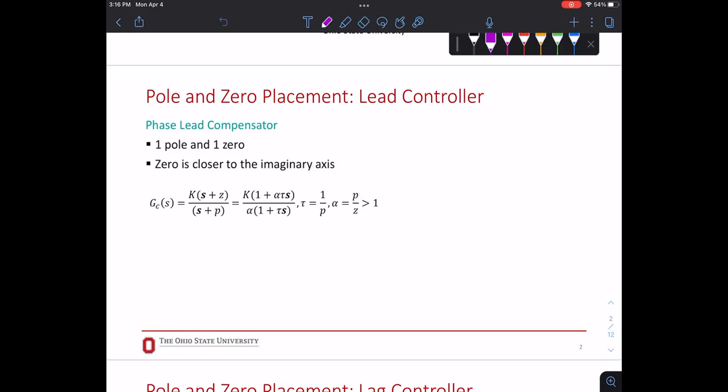You remember pole-zero placement that we discussed? If you add a pole to a system, it will change the behavior of the system. So lead and lag compensators are basically a pair of pole and zero. Now, the way they are arranged defines whether they are a lead controller or a lag controller. So if you have a system, let's say this is G(s), your plant and everything. It could have feedback inside of it. I'm just showing you the whole system as G(s).

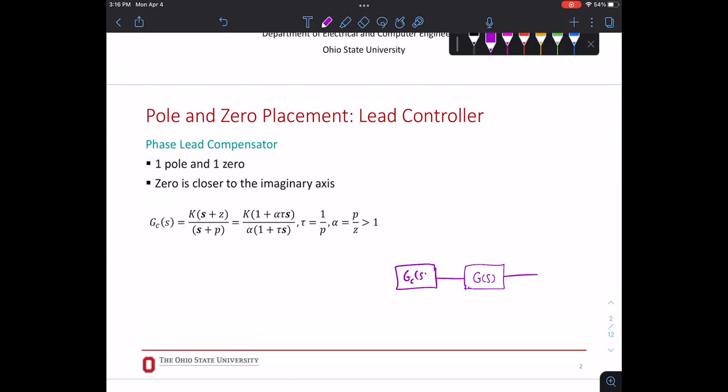And let's say we are designing a controller for it. I'm going to call it Gc, G of controller. In a unity negative feedback loop, with R and Y. Okay, so we want to know what is inside of Gc for a lead controller. We said it's a pair of pole and zero. Now I'm going to draw just the s-domain for the controller only.

Real axis. So if we place a zero, so it's a pair of zero and pole, there's two situations. Well, there's three. If they're on top of each other, they cancel each other out, so there's no point. The zero could be closer to the imaginary line, then you can have the pole, right? And then the other one is backward.

So if the zero is closer to the imaginary axis, is leading it, however you want to remember it, this would be the layout of your lead controller. Now, they don't have to be real pole zero, they can be conjugate pairs. Okay, but as long as the zero that you placed in the system didn't exist, it's a new zero you put, then you have to put a pole as well. These two pairs are going to be your lead controller.

All right, now the transfer function for G of C is going to be, well, we have a zero in the numerator, we have a pole in the denominator, right? We also can have a gain. You also might need to amplify this whole thing, right? So we can write the transfer function of the controller as G of C, a K, which is your gain. If it was 1, still a gain, but it's 1, right? So it can be greater than 1. S plus Z, Z is the location of your zero, which is closer to your imaginary axis, and P is the location of the pole. So this is the transfer function.

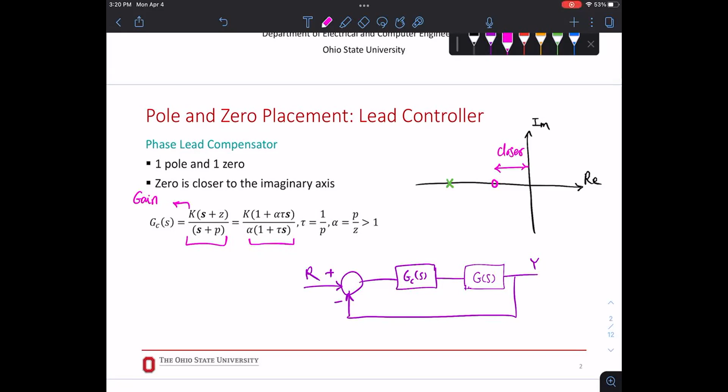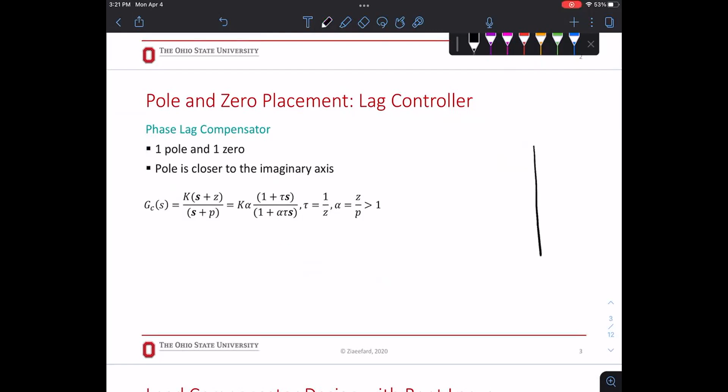All right. So this is one technique. This is the lead controller. Now, I will explain what a lead controller does, so you can tell, oh, my system does such and such, so let's design a lead controller. But let's work on the layout first. Now, guess how a lag controller looks on the S domain? So I'm gonna grab this guy, same system, right? This time, the pole and zero pair are switched. Now this time your pole is closer.

When I say close, it doesn't have to be really close. It could be here and here, right? So this is the lag controller we're adding. We are putting our pole closer to the imaginary axis. Usually when we design a lag controller, everything is a lot closer to the imaginary axis. So the numbers are very small. Now, if that pole goes further closer to the imaginary axis, it's going to be like a pole at zero, right?

What was the specification of a pole that is on the zero? On the center here, origin. So we are choosing a pole very close to the origin, and I put a zero close to it, right, on the left-hand side of it. So what do you expect to happen to our system when that pole is close to the origin?

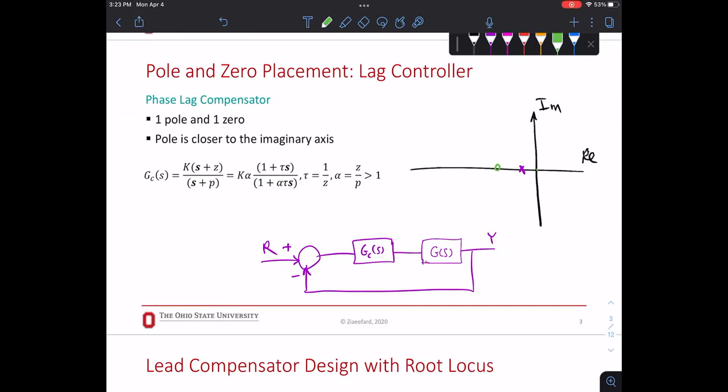All right, the different controller design. A PI would work, a lag controller would work too. Then the transfer function is kind of the same thing, but the numbers are different, right? This time your P is smaller than your zero. So Z over P this time is going to be greater, right?

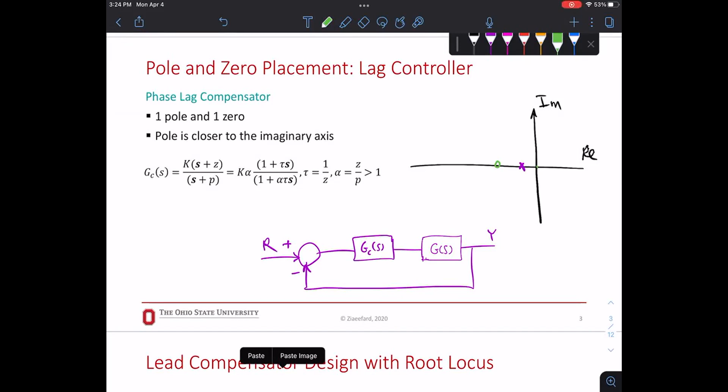Now, the cool thing about this method is that when I introduce you to the control design app, you place a pair of zero and pole, you can move them, literally drag them, change their value, and observe the response of your system. So you don't know where they should be, you come up with an educated guess. And then by dragging and looking at the response, you can find a final value for them, or close enough, because you're always going to have a requirement. So your system will meet your requirement.

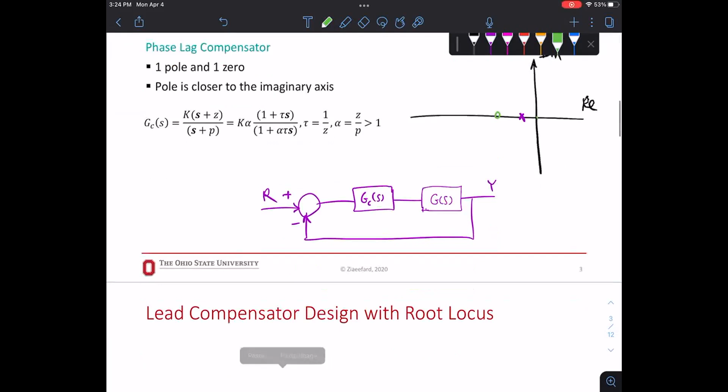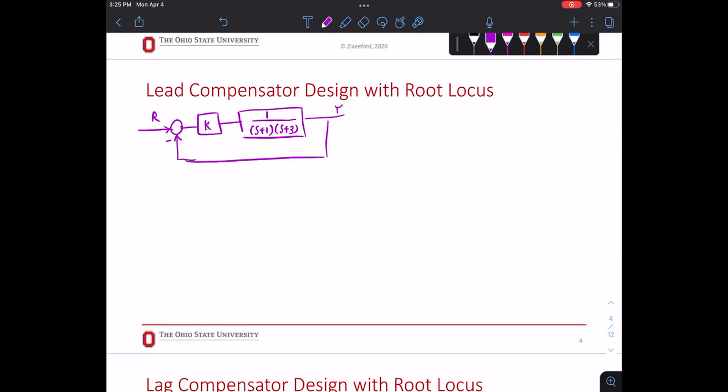Example, where's my cheat sheet? A simple root locus. If you're designing a root locus and your transfer function looks like that, can you draw the root locus for me quickly? So this K, you can find it from root locus and find a way that the system is stable. But do you remember how to draw the root locus for this? No.

Let's do it together. So we are in S domain, right? We draw our poles and we don't have a zero, all poles. How many zeros do we have here? Nada. What happens to these two poles? Where do they find their zeros? Come on. Okay, right? So we know there will be asymptotes. You have to do all of those things, center of asymptote, the angle of the asymptote, find all of those. But since we have seen this many, many times, we already know it's going to look like this, this one goes up. It doesn't matter.

So for this example, it's pretty simple. I chose this because it's simple. So I'm going to put my 0 here, and the pole has to be on the left side. So the 0 is close. It doesn't have to be closer than all the other poles and zeros to the imaginary axis. It just has to be closer than its own pole, because these two are the lead controller.

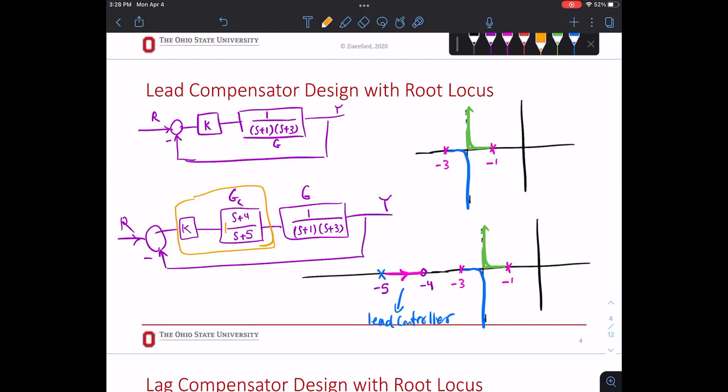Now, if I design a lead controller for that, so if we look at the response of that system, you will use MATLAB, don't worry, I'm just going to show you. So the response of the system looked like this. So there was some steady state error in that system. Now, we know that designing a lag controller is better, because a lag controller is going to get rid of the steady state error for us, because it has a pole close to the origin, right?

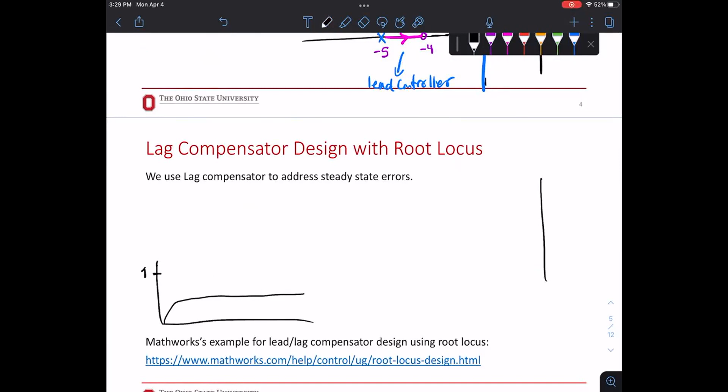So we will say, okay, if this was -1, this was -3, this time I'm going to put a pole and a zero close to the origin, -0.1, -0.3. This pair is going to help the steady state error of the system. So let me draw the thing here. The root locus plot of that, and the root locus plot of this is going to be here.

Now, if you look, the response changed. So this was a steady state error. This is with lag compensator. So adding those got rid of the steady state error. Now, you could say, I could design a PI controller, do it. That would have been fine. You could also design a lag controller. You could also design many other controllers. All right, so it's really dependent on which one you're more comfortable with.

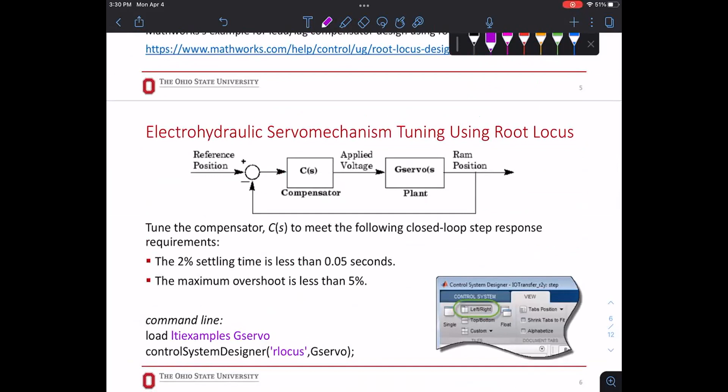If there's any other requirement, what does this mean in a physical system, all of this. All right, if it's a digital control, go for it. You don't have to do it as much as you need to. But you should be very comfortable using the MATLAB control system toolbox. All right, so before we go to this MATLAB example, if you have your laptop computer, go to MATLAB online. If not, you can just follow me.

I'm going to stop that, try to share my screen. Jeffrey, do you see the MATLAB page? Yes, okay.

So build your favorite transfer function. Doesn't matter. I'm gonna say 1 divided by S squared plus 2 times S plus 1. Let's make it S squared plus 5S plus 3. So this puts the transfer function at, oh, it has to be 6, right? Yeah, that puts it at 2 and 3. All right. So let's run this.

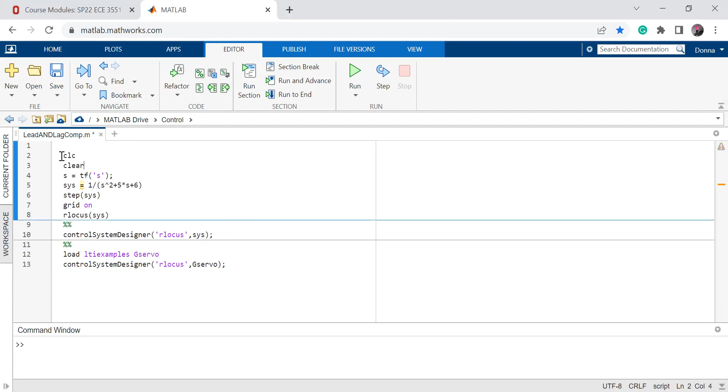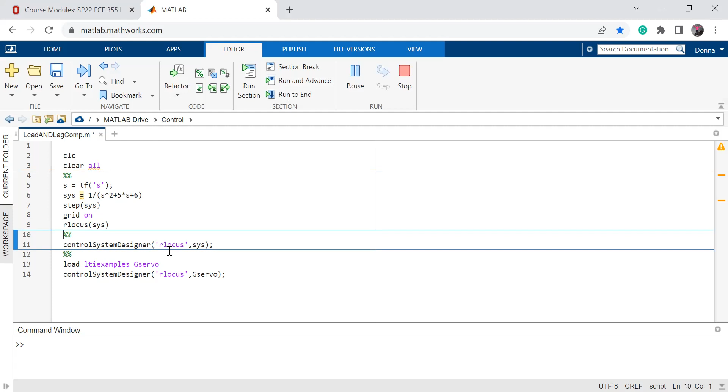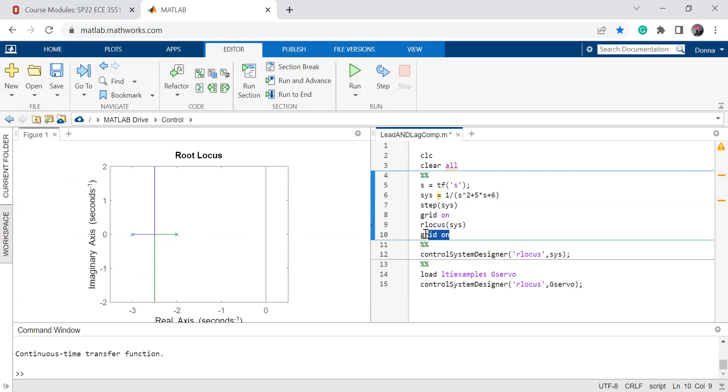Hold on. CLC, clear all. All right, let's clear it, run, and see what happens here. Oh, I'm just gonna see root locus because I did not call that one, figure 1. Okay, so this is the root locus, grid on. Run this as well. Okay, so for root locus grid on, it will show you omega n and zeta. You've used that before, right, in the exam?

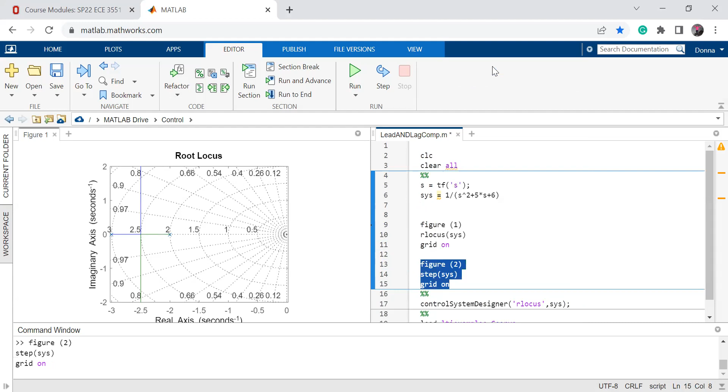So let's say if I wanted to see the step response, I need to create another figure, right? So let's say figure 2, if this works, because I didn't introduce figure 1, I messed this up. 1, this. We'll see. Let's plot that as well. Okay, keeps both of them. So here you have both of them.

There's obviously steady state error because it was a step function, right? And then, well, both of them are on the left side. So this is stable. We need to get rid of this steady state error. So you could go and design a PI controller, use the script, or go to Simulink, add your PI control here, right?

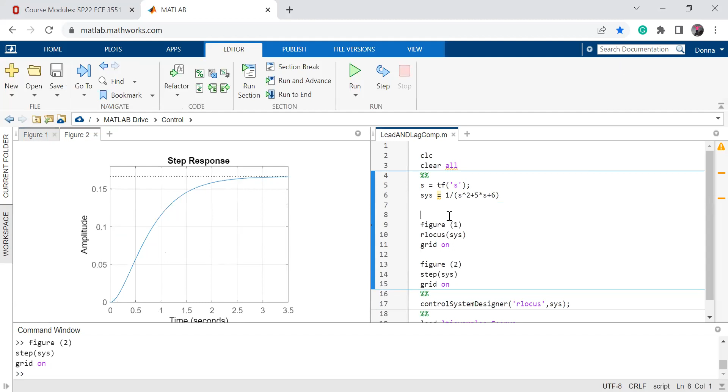Now, another tool that you can use to see both of these side by side instead of just going from one to another and manipulate it is to use this command, control system designer. Now, control system designer includes all the plots and all the analysis for your control. You installed the control toolbox before, so you should have it. If you run this and identify what you want to see, the analysis, root locus, we can later do Bode plot.

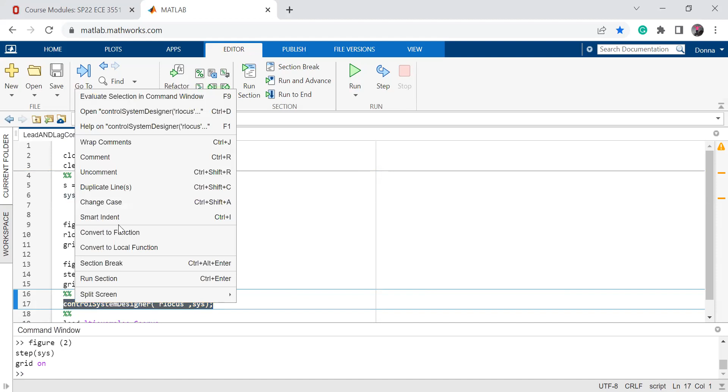You can ask what you want to see, and then it shows you that plus the step response, and then you see your system. So if you run this, you can do that later. We are going to use it for that bigger example. This is just a simple system that we created. All right. So control system designer opens, and you can see those two side by side.

Now, we said that all these values on the root locus are the system times K, right? You see these 2 pink points? These are graph points. Now look at the step response.

It's changing, right? So what is happening? By moving this pink part, I'm saying this is the K values that will give you specific poles and zeros, right? So let's say you want to pick K of 10. What would be the step response? You're going to say K now is 200. What's the step response? So moving this up and down, increasing or decreasing the value of K, you can see the values are down below.

Let me put this up here. So look down here. So damping, natural frequency, current value of your poles and zeros. You can see that you're getting close to it. So we're trying to get rid of our steady state error. I'm increasing K constantly, it's going up. Obviously, it's not getting there, and the more I increase, the shape of that response is changing. I'm increasing K by a lot. I still have a steady state error, right?

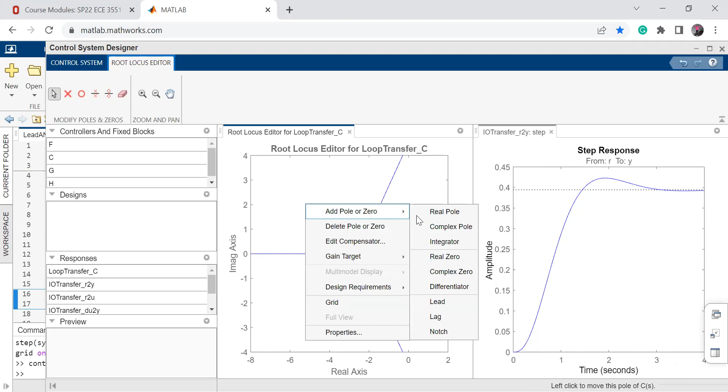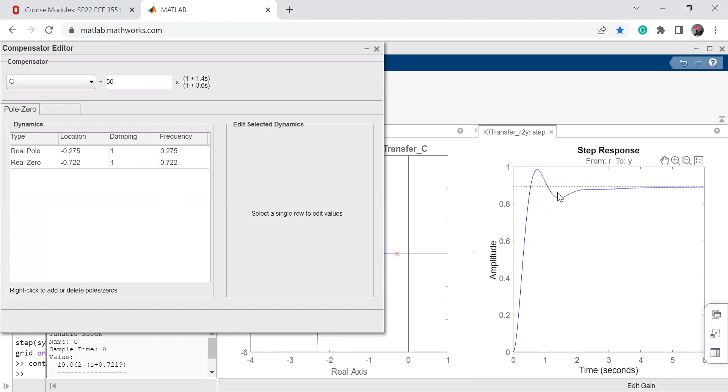So let's say that we're adding a real pole. I'm going to choose here, change the shape of the root locus and change the shape of the response, but I still need to add a zero, right? So add a real zero. If I want it to be lag, it has to be here on the other side. I didn't choose it close to the imaginary axis, so I move this guy closer to the imaginary axis and then pick this one closer to this. Okay, and then you can also change the gain of your controller. Let's say the gain is 3, but if I said 50, here it tells you where you put the pole and zero, and you see that already we are close to getting our steady state.

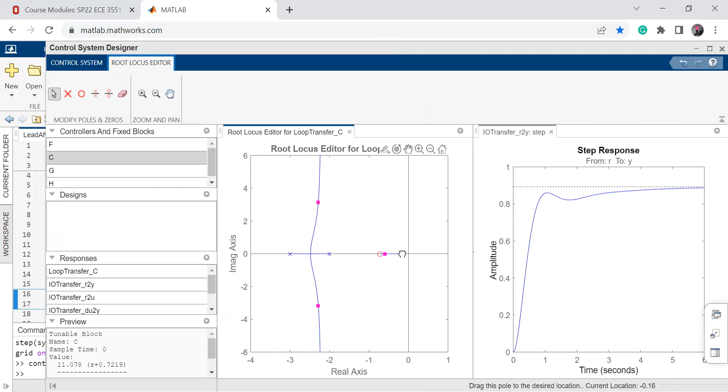So you can basically play with this, move this around a little bit. You see that I get it close, it's not changing, so I might need to increase the C value, or I need to design a lag controller, or you could delete those and maybe add complex poles and zeros. That might actually help to have an imaginary part here, as long as it's close, right? So you're building the controller and adjusting the value.

Now, if you would go with a MATLAB script, what would you do if you didn't have this tool? GC is S plus some value over S plus some other value, and then create a vector, or just keep changing those, looking at the step response to get close enough or not. So it's possible through script, but it's a lot easier here. If you wanted to look at the Bode plot, you could also bring the Bode plot here. All right, we will go over those later. When we talk about the frequency response, you'll see that we can have all 3 of them there.

Yeah. In industry, is there some practical difference that makes, say, a lag controller or a PI controller more favorable? In industry, they use PID. Lead lag controllers also have something to do with frequency. So if the frequency of your system was important for you, you could go with lag and lead. But to make it easier, they use PID. If you think about PID, it's also a zero, a pole, and a K value, right? KP. But you get some response from your system directly from the error, so it has a direct relation to error. Here it's just placing a pole and zero to change the behavior of the system. Okay, so that'll be the difference.

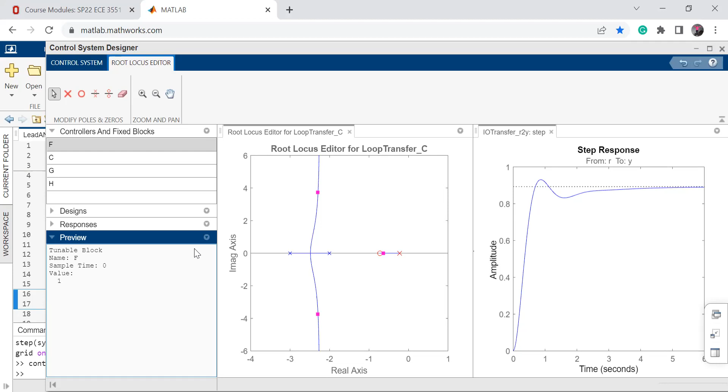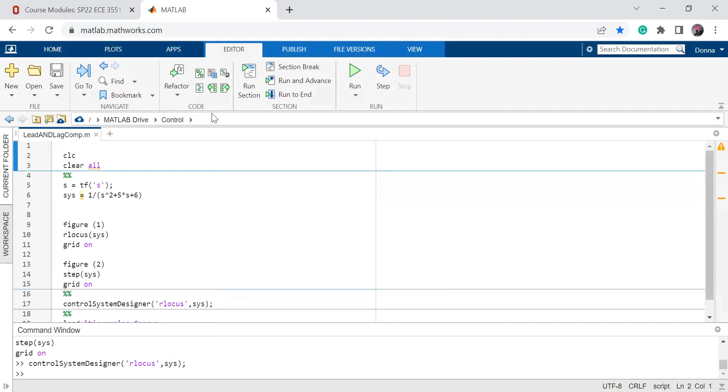But for that, you also need to have a computer. So I'm going to go over it briefly, but my expectation is that eventually you will go home and run all of those. I have given all the values in the lecture, so hopefully it should not be a problem.

Well, do you want me to show that slide or are you looking at the slide? You want me to show that slide? Raise your hand if you want me to show that slide. Okay, I'm gonna listen to Wilson. Let's do that so you know what the system is.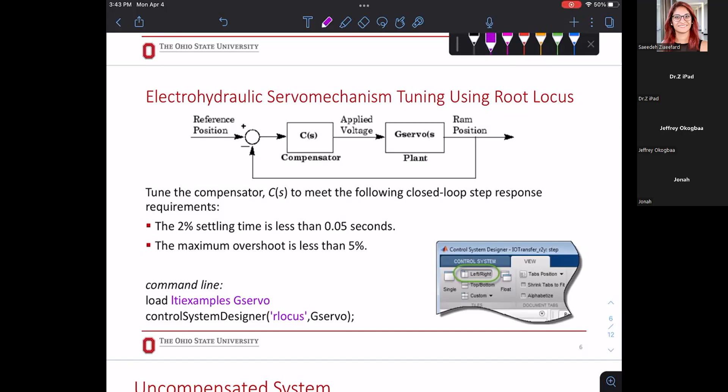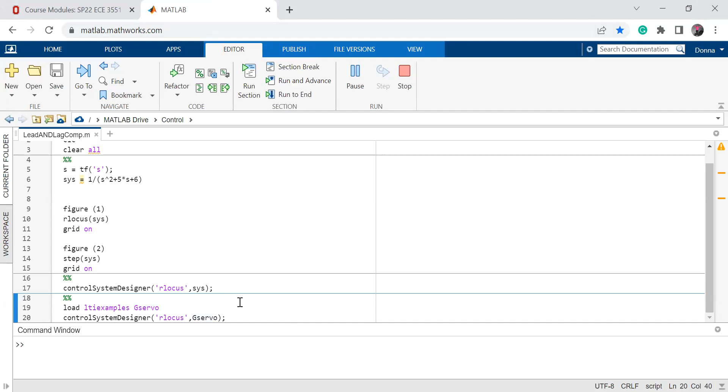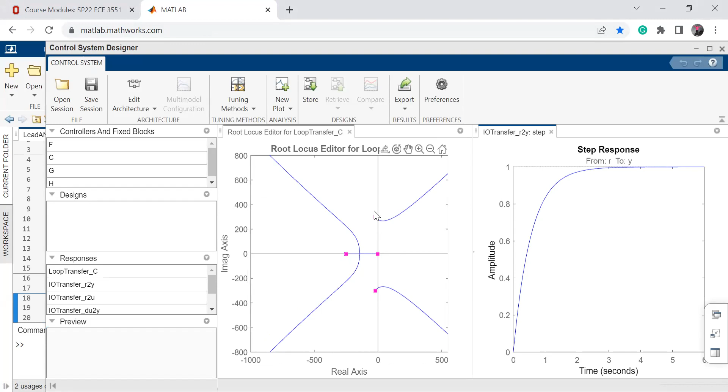The requirement for this design is the 2% settling time should be less than 0.05 seconds, and maximum overshoot is less than 5%. Now, if we load it, okay, so this is the root locus. I'm not expecting you to draw that because there's so much going on, but now you know what it means. It means that if your poles are on this side, the system is going to be unstable. I'm going to prove it to you.

So those lines are, yeah, right there. Then as soon as we pass over to the left side, everything is becoming stable. So the system doesn't have a steady state error, right? If we look at the system characteristics, we need a settling time less than 0.05 seconds, and it is like 3 seconds. Very, very slow. We need to make the system fast.

There is no overshoot right now, but imagine you want to make the system fast, you're going to see oscillation. So you have to compensate for that. So there will be an overshoot. It doesn't have to be 0, it can be less than 5%. Now, all we have to do is to add some poles and zeros as our compensator and see how the system will react. Okay? Any questions?

Why is everybody so tired? I am tired, but why? Exam weeks again? Okay. I feel like, again, what I'm saying doesn't really matter because most of you are going to look at it later. So it's like, let's go. Okay, I'm going to let you go actually.

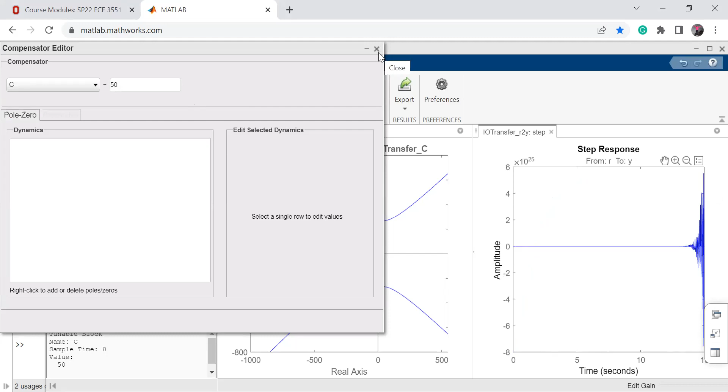So here, a lot of times by changing the compensator gain, you can see a lot of improvement in the system, meaning that just amplifying makes it go faster. It's like a KP, right? It just makes the system go faster. Just try value 50. Why 50? I don't know. 50. Whoa. Okay, how about we don't change that? Whatever it was. What was it?

Negative? No, it should not be a negative number. Here, back to 3. I just put a number. That was 2. Ooh, look at that, 0.72. I'm a genius. I have a good intuition. No, I have not. I just put a number. So just want to try, right? We do that. Now we need to add a pole and zero.

All right. We talk about the homework and then go to frequency response. So I'm putting it on your shoulders. There's no class participation today. My expectation is to go over the slides from page 8. Just build whatever I said to get a sense of how to manipulate. Okay, and then take 10 minutes to rest before the next thing.